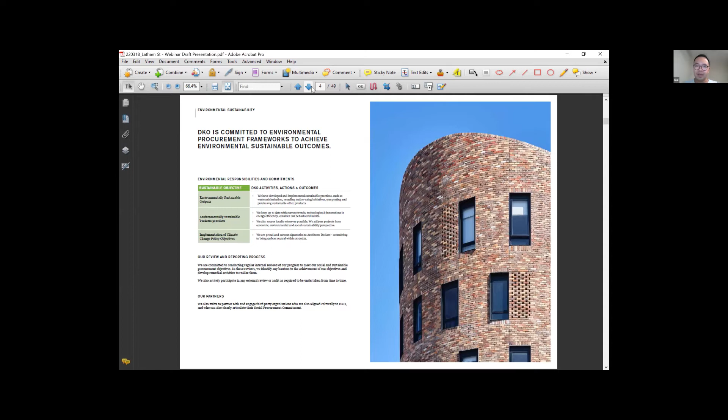We believe that green buildings are a really good idea. There's a lot of benefits, particularly if it's an asset class you're going to hold for the long term. Green buildings help with ongoing operation, maintenance, energy consumption, water consumption, waste generation, and ultimately the life cycle of materials and equipment used within the built form. I'll start by talking about 3 of the buildings we've done recently which have a sustainable slant, and then go into more detail about the Brisbane co-living opportunity.

Whenever we approach green building, we approach it from 5 key scopes: well-being, essentially being people-centric and looking at how we live our lives. Landscape and biophilic design, bringing nature back into the built environment. Energy and carbon: energy generation, electrification of buildings and the world generally. Active transport, as a way of reducing carbon emissions from cars but also promoting a healthy lifestyle. And finally, materials and waste, which go through maintenance and life cycle.

So the first building I'll share is the Arkadia building, which is in Sydney. This is a building for Defence Housing Australia, and it's a mix of affordable housing and market apartments. The building wears its green credentials on its skin, literally. All the bricks that you see on the building are 100% recycled brick.

We like to use thermal mass, particularly in a temperate climate like Sydney, where the winters aren't too cold and the summers aren't too hot, but it does get uncomfortable. Thermal mass is a really good passive way to moderate the climate within the buildings. We also make sure the buildings are orientated to maximize solar gain where appropriate, and shield the residents from undesirable solar gain, particularly from the west.

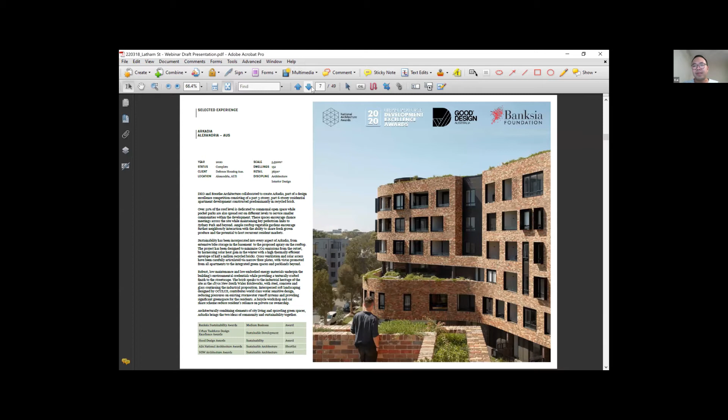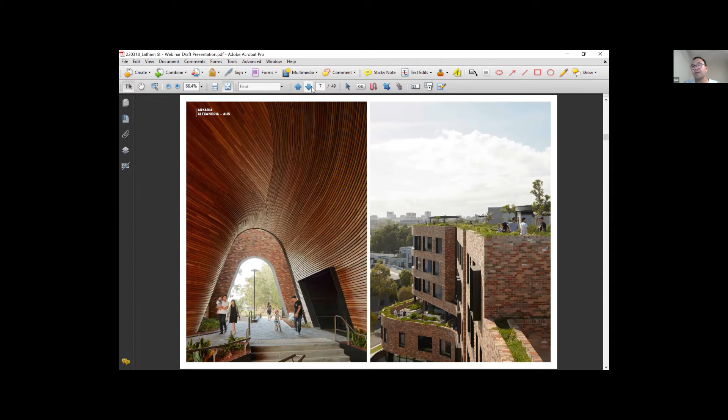The building has a series of communal spaces and gardens. About 50% of the roof is accessible to the community, because sustainability is not just about energy, materials, and built form. It is also very much about the community and social aspects of living, making sure well-being and mental health are addressed as part of design. We also design buildings with good linkages to their surroundings, so they are part of the community and neighborhood they sit within.

Various moments within the building demonstrate the linkages created, the solar protection afforded to some of the windows, and thermal breaks which help funnel air through thermal effects. A couple of slides show the recycled brick and the character it lends to the open living spaces. In Australia's generally temperate climate, outdoor living is really important, and how it connects to the indoors. And with the advent of COVID, we incorporated really good work from home spaces within the apartments, to enable residents to work, live, and recreate comfortably within the same apartment.

Next building is also in Sydney. This is Gibbons Street in Redfern. Similar climatic zones, slightly different client. This is for primarily affordable and social housing for First Nations and Aboriginal people. The building has a 7-star NATHERS rating. It's completely fossil fuel free, and it generates most of its own energy.

The materials were particularly chosen for life cycle reasons. They are hard wearing and also easy to maintain. On the left there, you could see some Aboriginal artwork, which we've commissioned a local artist to do within the building, because most of the residents in here are of Aboriginal or Torres Strait Islander descent. And then the slide on the right just demonstrates some of the mechanical systems and solar generation systems, energy generation systems we've put in place to help power the building.

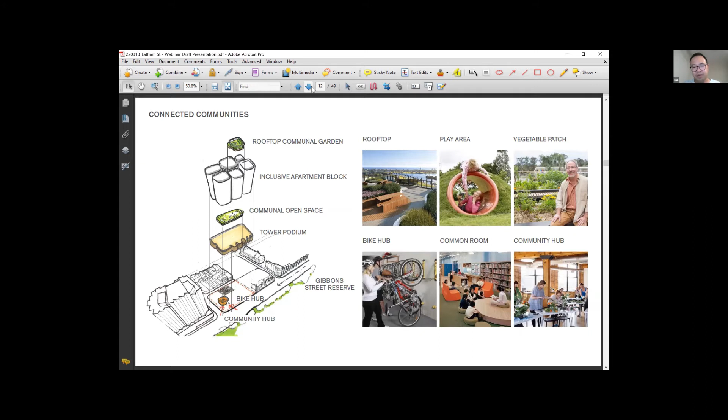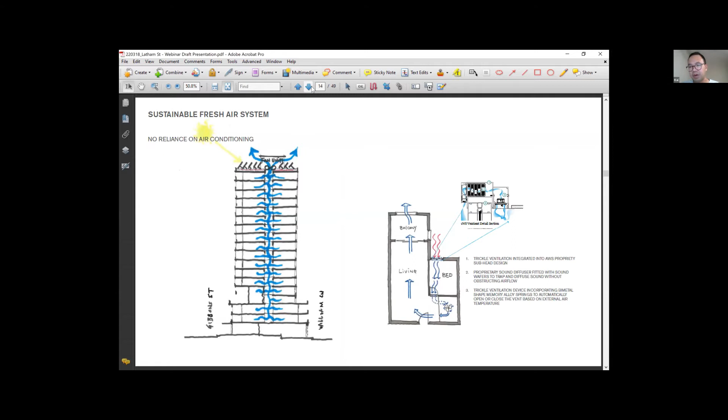A quick slide to show you a lot of the communal initiatives that we've carried through. Very similar to Arkadia, the whole communal and social aspect is really important when you're talking about sustainability. And then finally, some detail about materials. And then again, how we actually incorporate passive ventilation within the buildings through thermal chimneys, which help draw air through the buildings, so you don't need air conditioning as much as you would otherwise. There's some images in this context.

And the final project I'll briefly walk you through is Breese Street in Brunswick. This is a 7.5 NATHERS building, which is again a higher level. The built form responds to its industrial context with the sawtooth roofs, but the angle was also chosen primarily because it was the most efficient angle for photovoltaics and solar generation. So it served both an aesthetic and sustainable purpose.

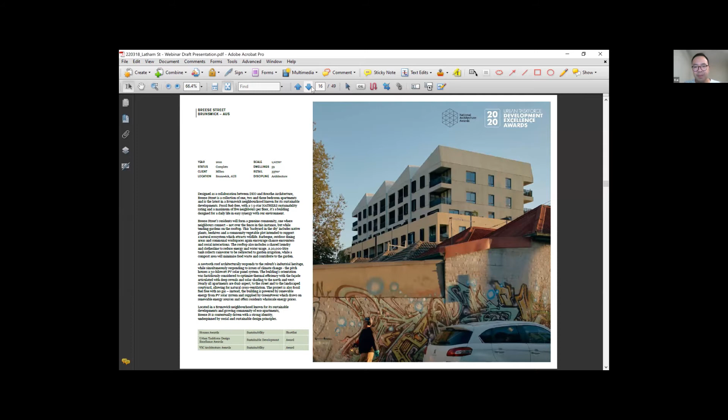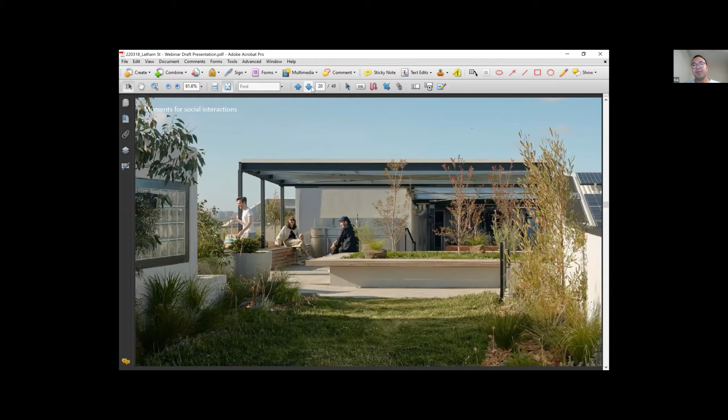The building, whilst an apartment, was designed with the concept of backyards in the sky, where most of the rooftop was again turned over for residents. You've got beekeeping, barbecue areas, laundry areas where you can hang your clothes, and that starts to generate some social cohesion within the building. Also a resident dog park, which is a favorite of the people living there. So 7.5 star NATHERS, fossil fuel free again, which means no natural gas is supplied to the building. Everything is done with electric. And also an image of the photovoltaic generation and 100% carbon neutral electric generation.

And again, all the materials chosen here are both chosen for their hard wearing nature, but also for their, I guess, natural qualities. The timber was specially chosen so that it was naturally treated. There are no chemicals that have been added that would otherwise release odor or fumes within the building. And then again, that kind of biophilic nature brings it back to its connection to nature. So I'll now talk a little bit about the Brisbane co-living opportunity.

Can I quickly just interrupt, just for our participants? You've mentioned the 7.5 star rating. Can you just put that in context? What would be average? What would be exceptional, and so on, please? Yeah, so this is an Australian rating, and I think Amir could talk to it more. Is Amir there? Yeah, I just made it back. Sure. So Rian just had a question about the NATHERS rating, which I think probably you can talk more about.

So the NATHERS rating system is a system used here in Australia to determine the thermal comfort levels within a residential dwelling. And it's a scale of 0 to 10 stars. You can think of it as 0 stars, it's the most uncomfortable dwelling. 10 stars, you essentially don't need air conditioning anymore, whether it's cooling or heating. And in terms of minimum code compliance, the average is somewhere between 5 and 5.5 stars. So to take it up to 7 or 7.5 stars, that's a significant step above minimum code requirements and minimum standards. Well said.

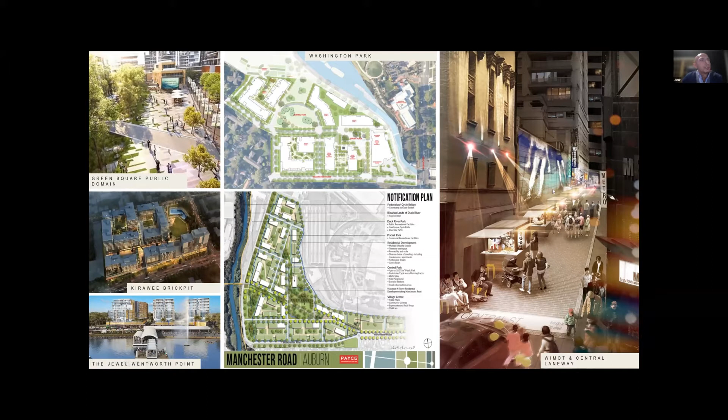And we're an employee-owned organisation. We're owned by 50 different shareholders, or what we refer to as principals, and I'm one of those, and I look after the sustainability part of the business. Now, over the last 46 years, we've been absorbing a lot of the information, with residential and accommodation precincts being at the heart of what we do, whether that's working with developers, architects, project managers, or builders. We've got a good understanding of what makes a residential building, whether it's low, medium, or high density, and what are the triggers of success that are typically required.

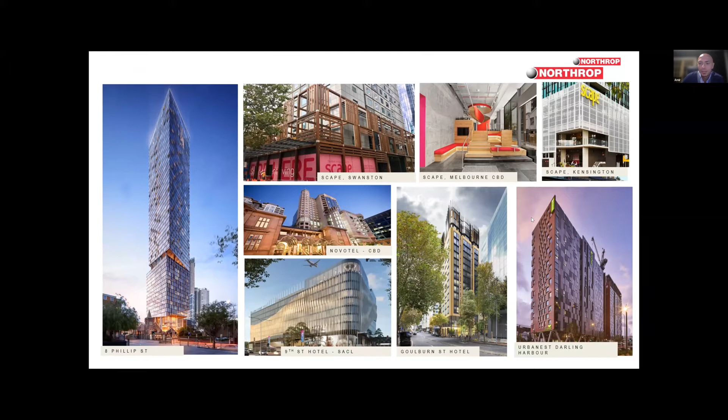And when it comes to co-living, whether it's student accommodation or shared accommodation, those triggers change slightly, but it doesn't take away from the fact that we need to make this project an absolute success, in that it needs to be talking to the financial bottom line, at the same time thinking about the occupant experience. That cannot be sacrificed, and the quality of the build, and thinking about the entirety of its lifetime should be at the absolute heart and center of what we do.

But the focus of what we're talking about today is climate change and how our activities drive climate change. We're talking about this because the building sector, when you think about operations of the buildings, procurement, construction, everything else, accounts for about 40% of the total emissions globally. So as a sector, it's quite significant. And there's a report issued earlier this week by the International Energy Agency that shows that this year, overall emissions have risen by 6%. So we're definitely trending in the wrong direction, and we've got a responsibility to do something about it.

What I'd like to do is unpack a little bit more what climate change is and the impact that we're having on the environment. So there's probably two key aspects. The first one is ecological footprint. If you're not familiar with this term, Google it. There's an eco footprint calculator that will pop up for you. You can plug in information about your standard lifestyle, and it will tell you your personal environmental impact. Fantastic toy to play around with.

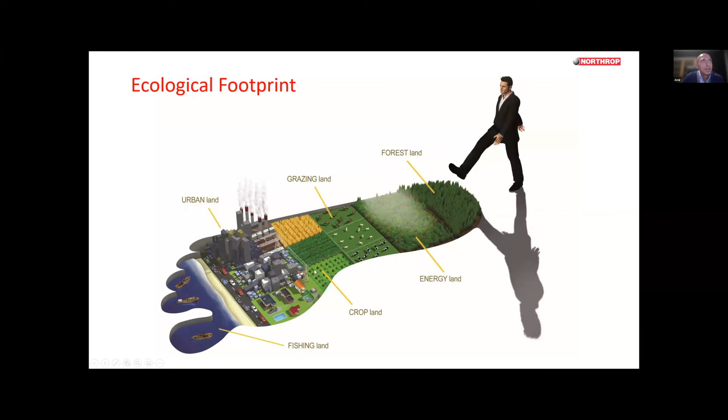What we're talking about here is if we look at all the impact we're having as human beings, whether that's forestation, energy extraction, urban agriculture, urbanization, or fisheries, and think about how much resources we are using, we come up with understanding those resources in a metric called planets. How many planets worth of resources? When this study was put together back in 2015, an average Australian lifestyle was using 3.8 Earths worth of resources. Five years later, in 2020, when this was updated, it was 4.1 Earths.

At the end of last year, I hosted a school student who wanted to do work experience, and I wanted to put up this slide to give him something to share back with the school and his family. And when I started talking, he said, no, I'm all over this. I know exactly what you're talking about. And by the way, when we've done this in the classroom, it was showing 4.7 Earths worth of resources. So we're trending in the wrong direction.

The only problem is we've only got one planet. There's no running away from it. From an equity point of view, we've only got so much to share. It's not an infinite resource, it is a finite resource, and we have to be mindful of it. So when we're thinking about setting a sustainability vision, whether for an organization, an enterprise, or a new project, there's a line in the sand that we need to draw and say we can't go below that line. And that line is usually what we call minimum standard, minimum code requirements. And that's where we're sitting with that 4.1 or 4.7 Earths.

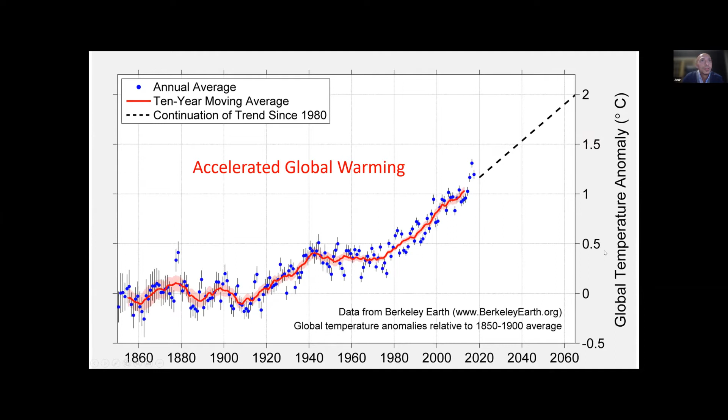Now, the second issue, which is probably a little bit more critical, is global warming and the accelerated global warming, and the fact that we're trending towards a 2-degree temperature shift. Now, the IPCC has also issued a report earlier this year that shows that we're definitely going to be hitting a 2-degree temperature shift by 2050. And with the rate that we're going, that's going to be even more accelerated, and it could be 2.5 degrees. Now, the biggest issue with that is that it starts toying around with the balance that we've got in nature.

And that particular cycle disruption, if you want to call it that, in 2019 resulted in a sea rise of 0.5 millimeters. Now, 0.5 millimeters doesn't sound like a lot, but in the grand scheme of things, we're talking about global sea rise of 0.5 millimeters. And if I continue on the topic of a disruption cycle, what that actually does is it starts charging up the climate.

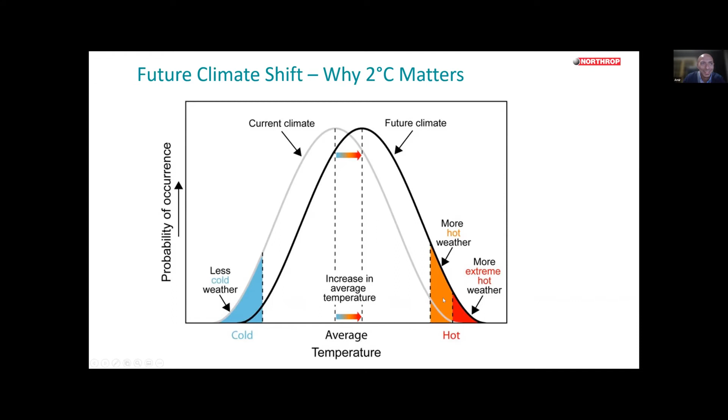Now, besides the people and the dwellings not being ready and equipped for that, think about equipment and think about all the indirect impacts and direct impacts that we start seeing from climate change. So I guess if you think about the risks, increasing temperatures, storm intensities, rainfall, etc. Excuse me. As designers, we have a very good understanding of what are the direct impacts.

If you think about your air conditioning systems, these are designed to operate at 100% at 35 degrees at factories. So we're talking about millions of units that are being shipped out of factories to operate at a maximum of 35 degrees. Anything beyond that, it would operate for 2 or 3 days, then it would fail. Now, you start thinking about 15 days worth of 45, 46 degrees, you need to start thinking about the damage that starts causing. That's besides the astronomical rises that we're starting to see in energy costs, the damages, flooding, failures, etc.

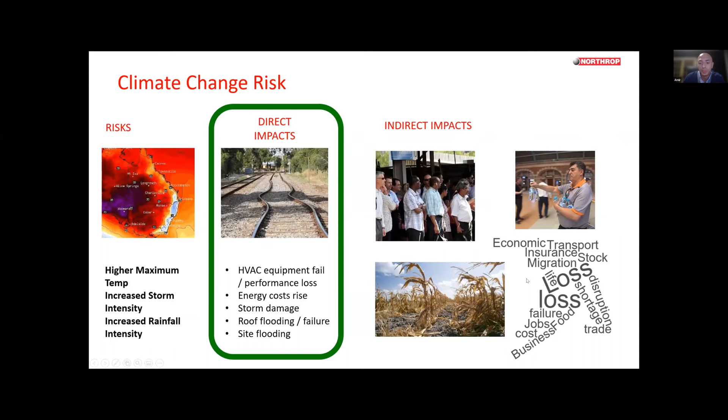And then all we're left with is loss. Loss of life, loss of business, economic loss, disruptions, trade. And again, we've got the ability to future-proof our assets today if we start designing for climate resilience for, I guess, the entirety of the lifetime of a building.

Now, I guess it sounds a little bit doom and gloom. That's not the intention. I guess I'm just raising awareness more than anything else. But the key thing to be thinking about is climate resilience actually creates a lot of value. So what I've been talking about in terms of designing for climate change, that's more on the adaptation side of things.

So think about what are the risks that the assets might be subject to, and think about how to mitigate those risks. But what about mitigation of climate change altogether, not just the risks? What about, again, contributing to reducing the impact that we're having on climate change and contributing to restoring the climate?

Now we're talking about a median price of about $700,000. So we're talking about some significant premiums that are being attracted here. And the other key thing to point out is that there's research that shows that there's a $2 billion untapped market of young individuals, young couples and young families who are looking to buy into sustainable living.

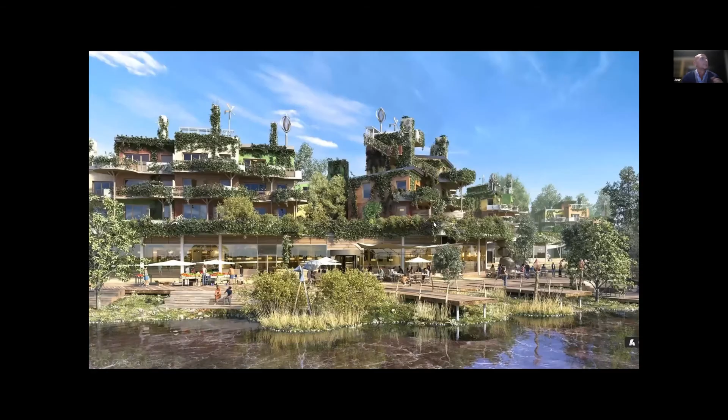The example that we're looking at on the screen there, for those who may not have seen this before, is Les Villages Nature Paris.

And if anyone speaks French on the call, I'm sorry if I butchered that.

But this is an ecotourism destination that has 900 holiday homes, and it attracts about 900,000 people annually. You can see a lot of fantastic key features there in terms of enhanced ecological, external and internal ecological value. You can see on-site renewable energy generation that's above and beyond just solar.

But probably one of the key things that I quite like about this one is an open-air swimming lagoon that's heated up to 30 degrees using geothermal heat pumps, which is essentially running loops to the ground and to the core, utilizing the fact that we've got constant temperatures below the Earth's surface throughout summer and winter, and just extracting heat from that and using it to heat up that lagoon.

This project has been delivered in partnership between Euro Disney and Groupe Pierre Vacances Center Parcs. So it's a fantastic development that shows how you can enhance the quality of a destination, and then the revenues just start flowing through. Another example is what I refer to as the big project.

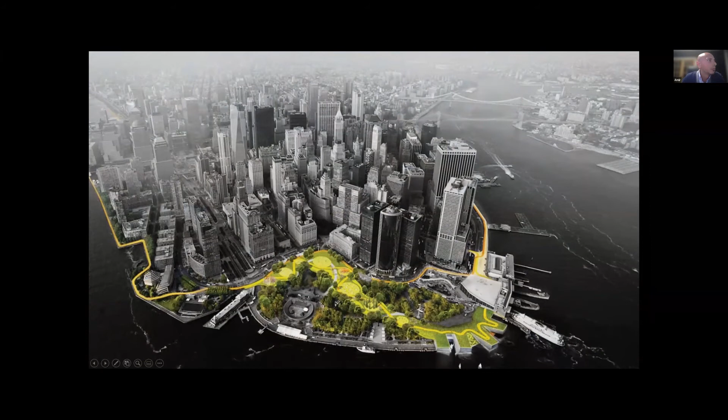This is a $335 million commission that's been happening over the last 4 years. This is Lower Manhattan, if you couldn't pick it out. And this was a commission that was put in place after the last set of damages that were experienced by Hurricane Sandy. And basically what we're looking at here is a storm surge protection barrier that's being instigated to protect the cityscape by implementing all those natural bioswales, parks and the like.

And what you can clearly see here is that it's not just about protecting the assets, but what's happening in the process is that there's a lot of space activation and pulling communities back into the cities. And one of the clear things that we've all been seeing as an effect of COVID is that all our CBDs have turned into ghost towns, and all different governments and councils and local property councils are thinking about different metrics of how they can pull people back into the CBD. And this is one of the clearest ways of how this could work: space activation, building communities, and creating a space where you can live, play, and work.

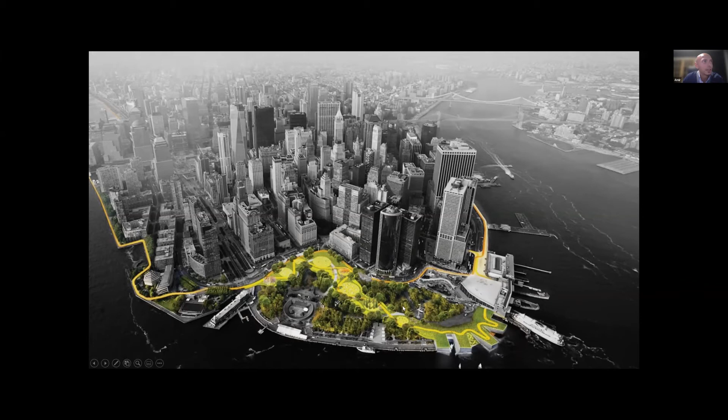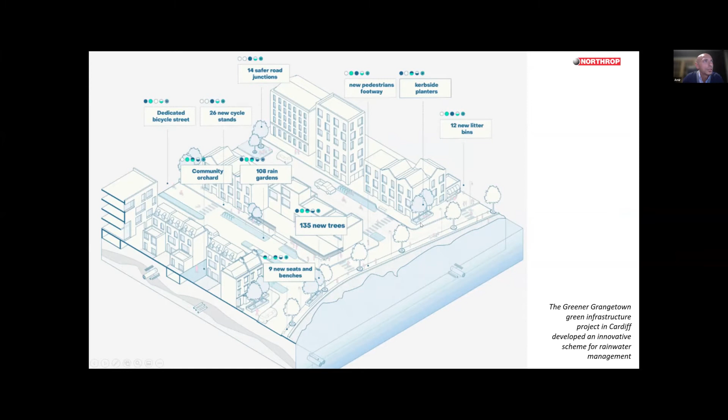Another one is the Greener Grangetown project in Cardiff. This happened at the same time a refurbishment or urban activation project was being undertaken for the new high-speed rail link project. And this particular one is quite interesting because they set up a stormwater treatment system under the entire precinct, and what they've done in the process is developed an innovative scheme for rainwater management.

And what they've done is created this whole concept of live streets by, again, looking at a lot of rain gardens and bioswales by way of treating stormwater, and looked at planting different species and trees in particular. And that has been a very clear way that not only ticks the boxes from a sustainability point of view, but when you think about lifting the value of the asset, absolutely ticks the mark.

There's a research paper that I saw about 4 years ago that showed every tree that's being planted outside a low density home enhances the value of that dwelling by anywhere between $5,000 to $15,000, which is quite significant. It's nothing to ignore. So, when you're looking at your next project or investing in a project, and the first thing someone's talking about is we need to get rid of those trees. Well, not really. Maybe we need to talk about how do you either build around it or relocate it. But there's a direct link in terms of lifting the value of the asset there.

Amir, can I just ask you a question? You're mentioning adding $15,000 in value and so on. So from a valuation perspective, how difficult is it, or what's the best approach to determine that value or that value add?

Look, I guess it comes down to the sector. Back to the rating tools that I was talking about. One of the key things that we started seeing here is that having a building that targets one of those rating tools, that is the easiest way to demonstrate value. I guess the commercial sector is probably a little bit ahead compared to the residential sector, but you'd experience this anywhere in the world, actually, with any building sector.

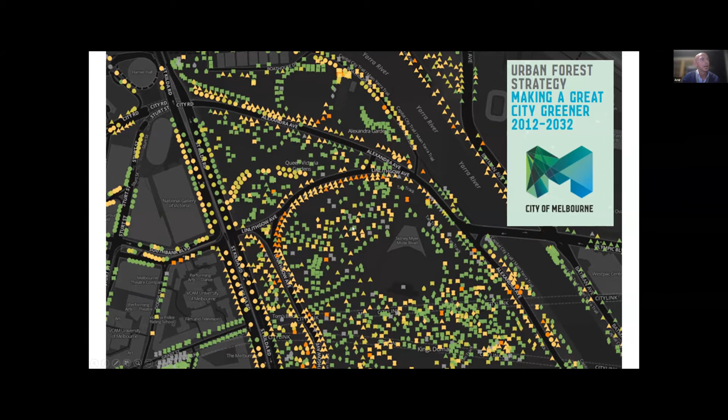Blue grids is having a lot of the waters and the creeks run through and one connected big stormwater system. And the green grids is looking at vegetation and how you can actually enhance that. Again, urban heat island mitigation, as well as lifting up the asset value and place activation throughout the cities.

Timber is obviously a massive one around the world. It's been gaining a lot of momentum over the last 10 years. And CLT timber, structural timber and construction is now becoming more and more of a norm. We're now starting to see projects that are challenging height limits and a lot of the perceptions that are out there. We're seeing buildings that are 20 plus stories.

And in terms of a footprint, we're working on a building at the moment that's got a floor plate of 2,400 square meters. Apologies, don't know what that is in feet, but someone can do the conversion for me. But there are no more restrictions around fire resistance, scalability of timber.

Timber is a fantastic carbon sink if it's sourced from what we call FSC certified or Forest Stewardship certified timber, that means it's coming from either a recyclable source, or it's coming from plantation sources that have been running sustainable plantation schemes, which means every piece of timber that's being used is being replanted again, and over the lifetime of a building, it's a renewable source of materials from a circular economy point of view. That's besides the fact that it's just a carbon sink.

It just sits there. Timber buildings, compared to steel buildings, steel uses about 5 times as much embodied energy and carbon in the procurement and the construction process. And concrete buildings, they use about 24 times as much. So it only makes sense for us to be using timber.

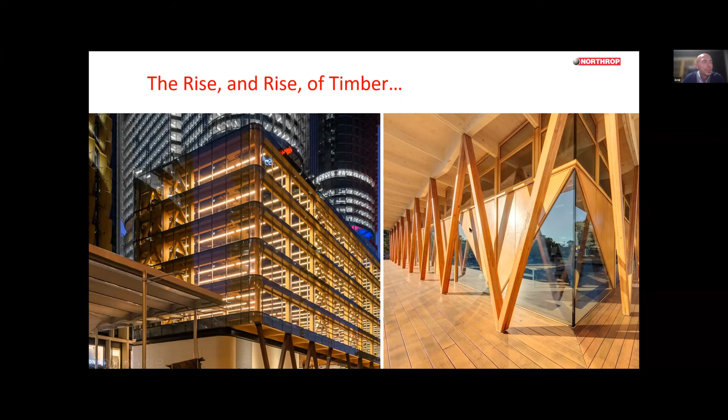Besides the embodied carbon in the construction, it's a fantastic wellness and biophilia initiative. As human beings, we're wired for our brains to be connected to nature. Hence, when you're working behind a screen and you want to de-stress, you want to be looking outside a window and have a visual disconnection from this artificial environment that you're glued to for 8 to 9 hours. You want to be looking at skies, greens, water features and the like.

And bringing timber inside spaces that we occupy is a fantastic way of doing that. Besides all, I guess, the benefits from a hypoallergenic point of view, in that it's the least amount of toxins that you can be putting into a space with the right treatments and the like.

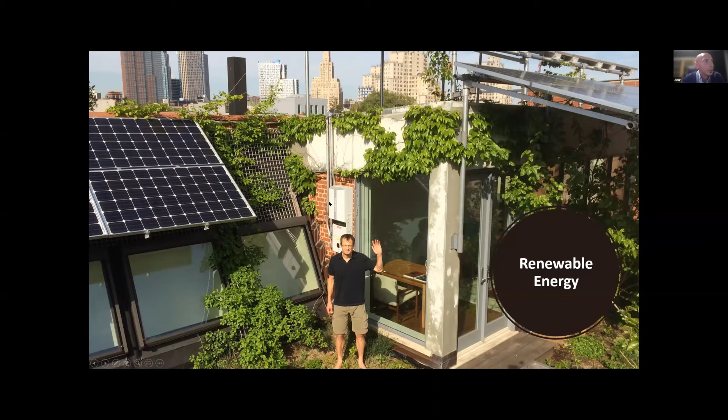Another fantastic one is renewable energy and energy sharing. We're starting to see the rise of blockchain, which is the ability for individual owners and occupants of residential dwellings to have their own micro renewable energy plant on their own roofs and harness all this power, put it into the battery, and be connected to the wider community, in that if they realize that they've harnessed so much energy and they don't have a use for it that particular day, they can actually sell it to the adjacent neighbor and get paid for it by way of an incentive.

And when you start implementing systems like that, the first thing you're thinking is, yes, please give me more solar and give me the biggest battery that you've got. So these are the small change of mindsets that we can be looking at from an investment point of view to unlock all those different options.

Last slide that I'm going to leave you with is that we're talking about a lot of ambitions. The world is racing to a 2030 and a 2050 net zero target in order for us to be able to mitigate the risk of this 2 or 2.5 degree temperature shift. That doesn't mean that we have to go 150% effort today.

I guess what we're promoting and advocating for is today is the day that you stop and think, what can I do to create a plan to hit a target in 2030 or beyond? And what are the step changes that we can start taking today? We don't have to do it all today. You can start taking small steps, baby steps towards reaching that target, and that will still be commendable, and that will still address a lot of your investors' needs and a lot of the demand of the market that is out there.

Thank you. Sorry once again about the disruption, but I might hand back over to Guy to continue with his fantastic presentation and perhaps take us through the Brisbane project that we've been involved with recently. All right, thanks, Amir. Great presentation as always. Let me just continue on from where I left off.

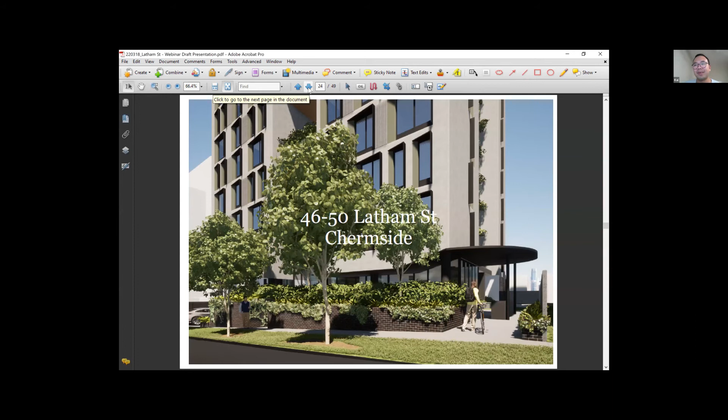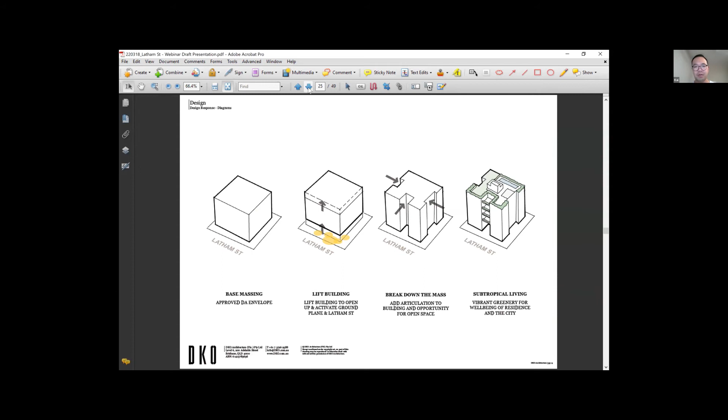So the Brisbane co-living project. So look, it really worked well with Amir setting up the presentation before, because a lot of the things that he touched on, the broader picture stuff, really gives the context where we are starting to carry some of these ideas into the building we're doing. So just looking at the building, it actually starts out with an existing approved envelope. And in order to convert this into a co-living building, one of the first moves we did was lift the building off the ground plane.

A co-living building houses quite a lot of residents, and a big part of the sustainability when you talk about co-living is the communal aspect of it. How do you create a community of people within that, and then the benefits that come through that? So making sure that the ground plane was a great place to be, that there was a part where the public and private could meet.

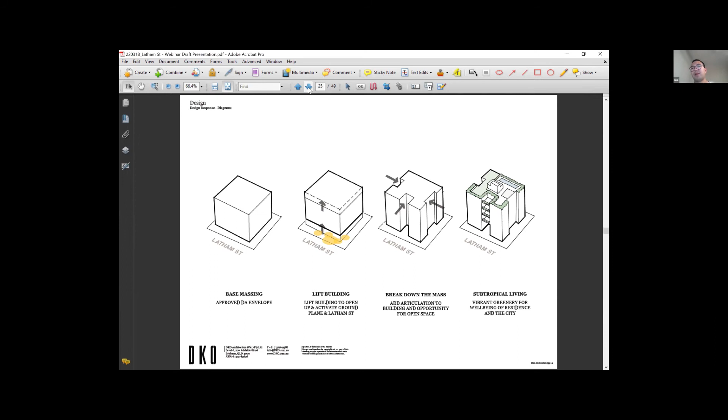And the next thing we did was cut deep slots within the building. A lot of it's to do with bringing natural light deeper into the building core, making sure that there was natural ventilation, and making sure there was good cross flow through the building. And then finally, because we are in Brisbane, a subtropical climate where you spend a lot of your time outdoors, making sure that there was a lot of greenery in the building, bringing in those biophilic elements that Amir mentioned just now, and making sure that the building was green both from a planting and landscaping point of view, but also from a sustainable point of view.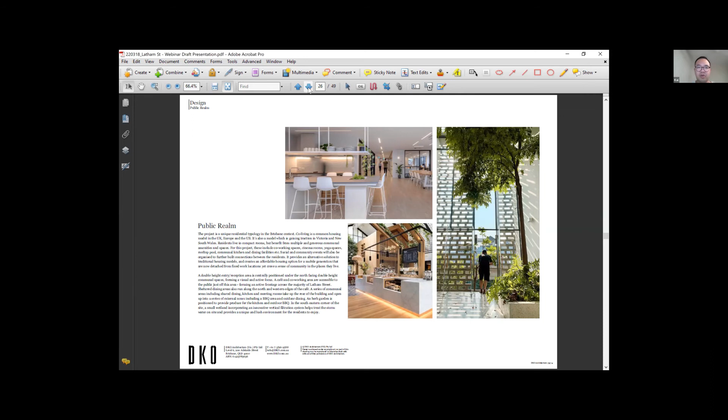The public realm was something we worked quite hard on, as we mentioned. So we're looking to put in a lot of great communal features in here. There's going to be a large co-working area linked to a cafe. The cafe is going to be open to the public, and that will create a really buzzy hub at the entry. Further back, we've got social spaces like communal kitchens, communal dining spaces, and outdoor rooms where the residents could cook together, clean together, enjoy a meal together, and then generally enjoy the outdoor spaces within the property.

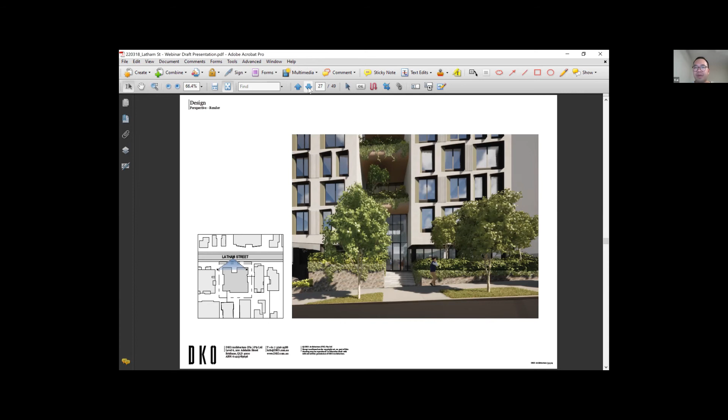The building takes a lot of its cues from the history of the site. One of the ways that we like to work is to look at the context of the building.

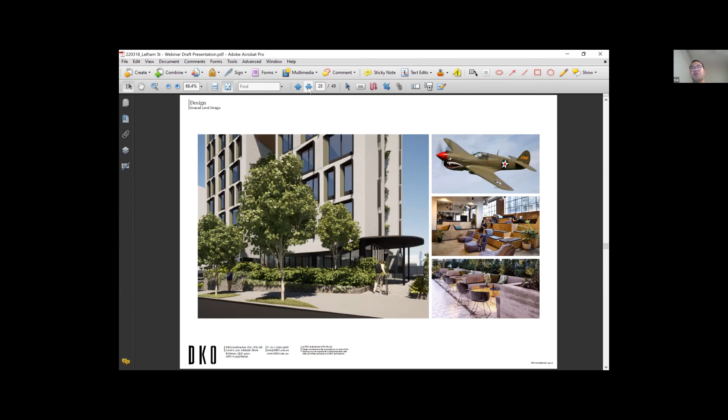Chermside used to be home of one of the Australian Air Force bases, and some of the colorations and the forms that we use actually draw on the Kittyhawk flag, which is quite an iconic plane used during that period.

Up through the tower, we are looking at a lot of communal spaces. You've got little discrete communal spaces on each floor, but on every second floor, you have a double height outdoor area, or what we call an outdoor loggia. This is protected on all sides except for one, where you look to the north towards the views, and then obviously generous landscaping around seating areas.

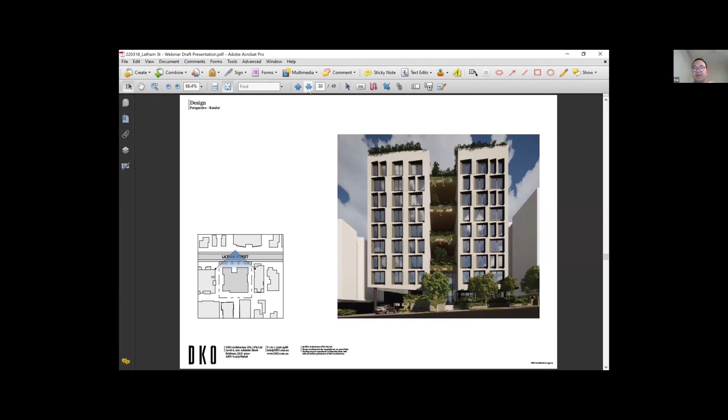One of the key things that we always look at when we are designing in Brisbane is what the local council requirements are. From a sustainability point of view, council goes by a code which is called Buildings That Breathe. There are 8 elements within the code. And for all the projects that we do, we really look at how we can address each of these elements to help both from a development application point of view and to be successful with council, but also to incorporate the sustainable elements that should be done within built form anyway.

So orienting yourself is the first element. By this we mean that we have designed the rooms so that they are orientated to take advantage of the northern elevation and eastern elevation, protecting the rooms from the western elevation, and also minimizing the ones that are facing true south because they get the least amount of sunlight, and also making sure that views and opportunities are captured.

Occupy outdoor spaces is especially important in a climate such as ours. The subtropical climate means that a lot of people spend a lot of time outdoors. And when you're in a co-living building, what we try and design for is outdoor spaces where people can be joined as a community or communally. So rooftop spaces are important, as well as the double height sky decks that I've mentioned before.

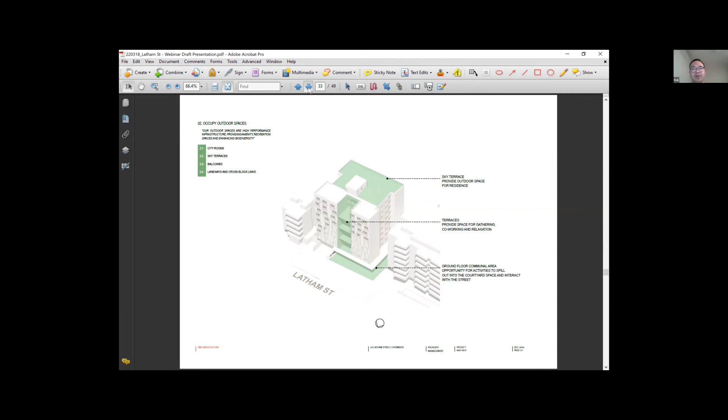Natural daylighting is important from an energy reduction point of view, making sure that the windows are appropriately designed so that they let in the right amount of light and the right kind of light, but also making sure there are awnings and sun hoods to the windows so that they also block out lighting that is not necessarily wanted. For example, the harsh western sunlight in afternoons, which makes rooms pretty hot in most instances.

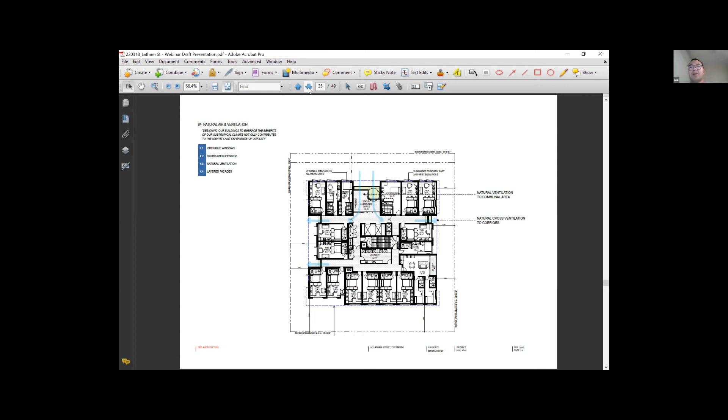Shade and protection I've mentioned. Good orientation is really the first principle of good design, and then where we need to, we add further protection to those openings. And then finally, living greenery, and I'll talk to this a bit more in the last slides at the back, where we go more into the landscaping. But needless to say, Brisbane is an environment where landscaping grows really well. There's a beautiful lushness to everything planted here, and that's what we want to take advantage of.

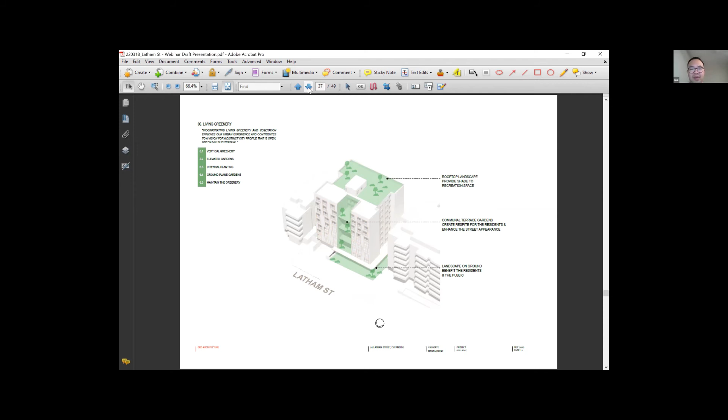And identity matters, which touches on choices of material, longevity, and maintenance, making sure that the life cycle is considered, especially because this is an asset that you will hold on to for quite a long time. And finally, reducing energy and waste, which is really about opportunities for generating electricity on site, capturing rainwater and reusing that on site, and also reducing waste through good waste management systems with the residents.

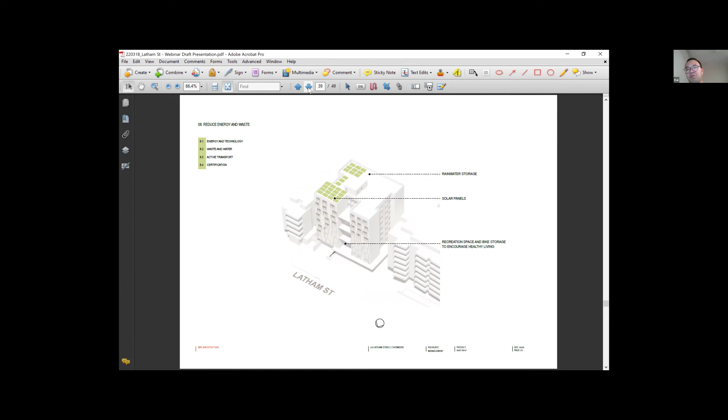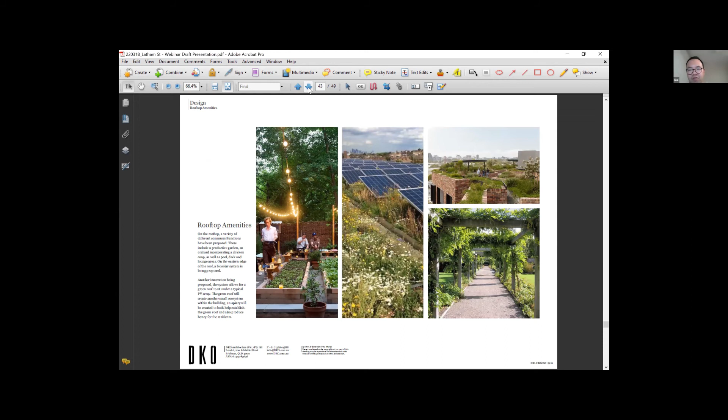I won't go through the floor plans because I think we're running out of time, but we'll quickly touch on the roof. So the roof terrace is really meant to be this lush playground for the residents. And then with the landscape elements, we're looking at integrating water sensitive urban design, a wide range of amenities, layering of the greenery, and then creating engaging spaces.

And then these boil down to 5 sustainable design principles in landscape, which is minimizing impervious surfaces so rainwater can be captured, providing different microclimatic conditions, a pool in the sun so it's nice and warm when you're swimming, but also shaded spaces so you can go outside and read a book away from the sun. Water sensitive urban design and how we treat and store water.

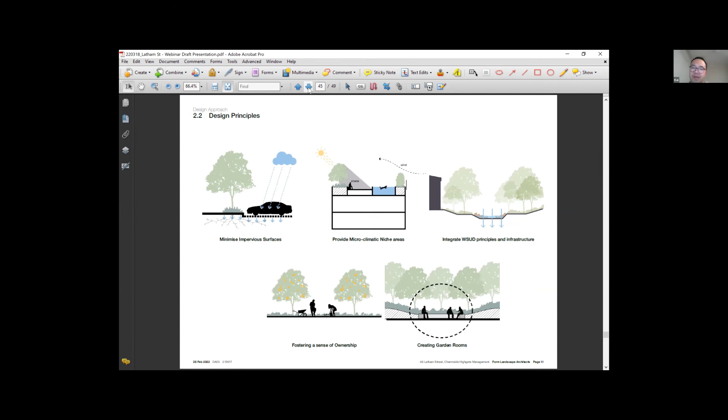A sense of ownership is created when we start to provide productive gardens, apiaries, chicken coops, and the like for the residents, and they can start to take a bit of ownership. And then finally, creating garden rooms so you can enjoy the great outdoors.

One of the more creative things we're doing here is what we're calling a bio-solar facility, which is basically creating a solar array to generate renewable energy, but also creating microenvironments underneath that to cultivate flora and fauna on the rooftop of the building. And that's kind of a snapshot of how the roof looks at this moment. On the right is the biosolar array.

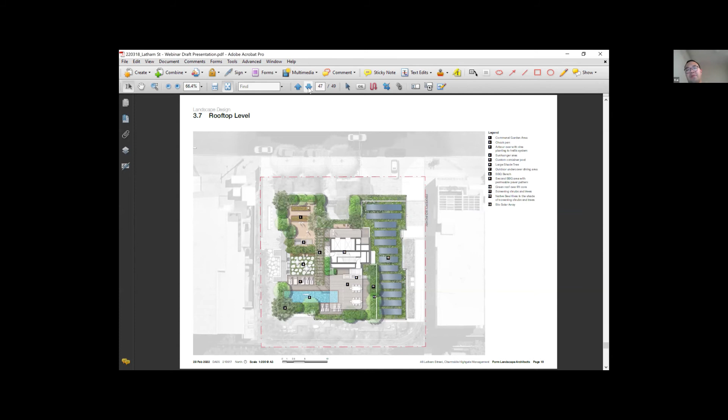You can see that the rest of the roof is highly programmed. You've got productive gardens to the top left. You've got barbecue areas linked to that. You've then got a quiet zone for yoga and so forth in the middle. And then finally the pool zone with lush landscaping all around to provide natural shading and so forth.

And then just finally touching on the irrigation strategy. Rainwater is really important to be captured and stored well, particularly given the weather events that Brisbane's been encountering recently, making sure that we're capturing as much of the water as we can. Some of the water needs to be filtered, and to do that, we've created a little mini wetlands with a biofilter and creek through the site, and that also becomes a great amenity for the residents.

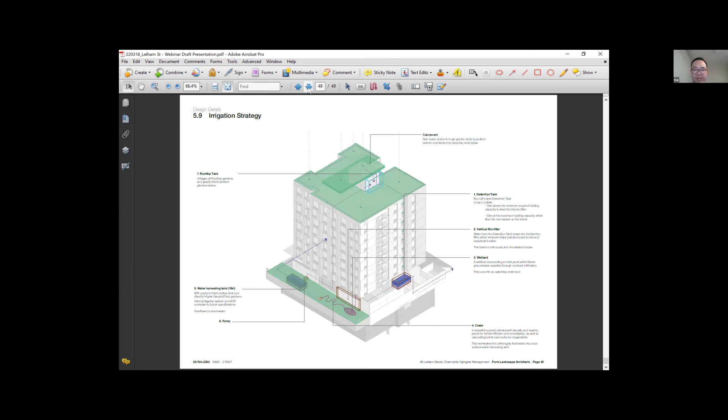The water is then harvested and reused throughout the building, so there's quite a nice water cycle storage through there as well. And I might end it there.

Back to you, David. Thanks, Kai. Fantastic presentation as well. I'll just try and share my screen and I'll get back to where we were. Okay, thanks to both Amir and Kai. Had to swap the order of presentations a little bit there.

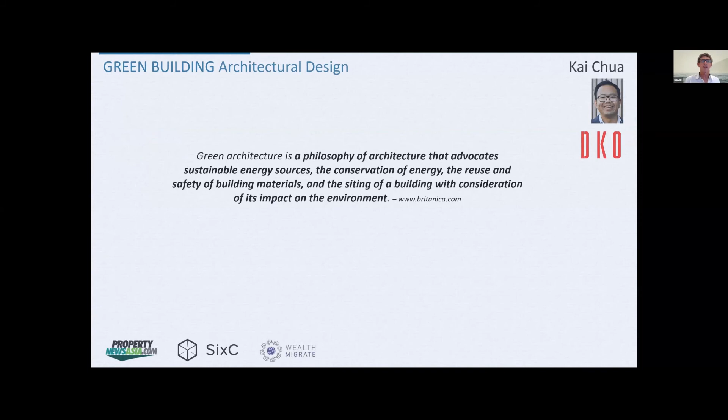I'll go through fairly quickly what I've got to get through because I realise we're running out of time. I'm going to talk about co-living, and then in particular the Brisbane co-living building, but from a developer owner-operator's perspective, rather than just from a design perspective.

So humans have caused a lot of degradation and stress on the planet. It's up to us to mitigate further damage. As Amir has shown, the real estate sector is one of the biggest contributors to climate change, accounting for some 25 to 30% of the overall. However, there are innovative alternatives out there, and one of these alternatives is co-living. The co-living sector has a big potential to contribute positively to the real estate industry as an environmentally and socially sustainable housing model.

The purpose-built co-living sector's positive contributions to reduce impact on climate change. As Amir and Kai have shown, we can achieve sustainability through leading-edge design that reduces the cost to heat and cool a building, and also mitigates the heat island effect. Then the reduction in operational expenditure through reduced power usage, which is really a focus on life cycle costing across a building's operation and development, instead of just focusing on its capital expenditure cost up front.

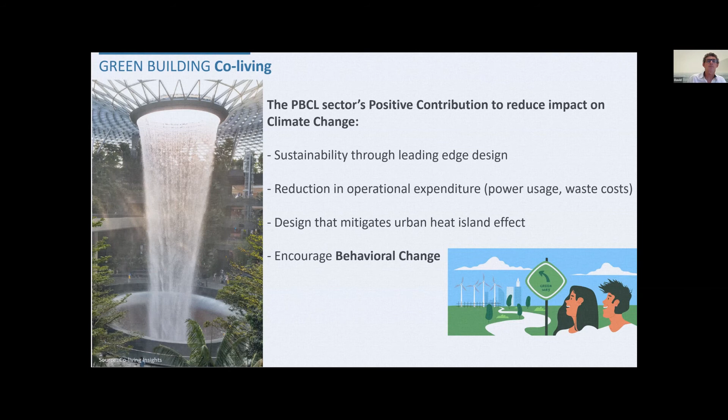Also, one of the things that co-living operators can help with is that we can actually encourage behavioural change by helping inform, encourage and influence our guests. So on that note, shared living can have a catalysing effect on pro-environmental practices. Co-living operators have the ability to influence the behaviour of their guests to create communities that inspire climate action and awareness. In doing so, this can lay the foundations for a pro-environmental culture.

Simple examples include putting a timer on showers, monitoring power usage, but monitoring it so that our tenants have that information at their fingertips, so that they can actually understand what their usage is, but going further than that and creating fun and rewarding incentives for tenants to actually watch it, look at it, and reduce their power and water consumption. We can also encourage modal shift to public and active transport options.

For our co-living development in Brisbane, we have been able to leverage off Brisbane City Council's green building incentive policy, as well as optimising life cycle costings for the building through reduced energy and water consumption, as well as the savings that are becoming available through green-focused financiers.

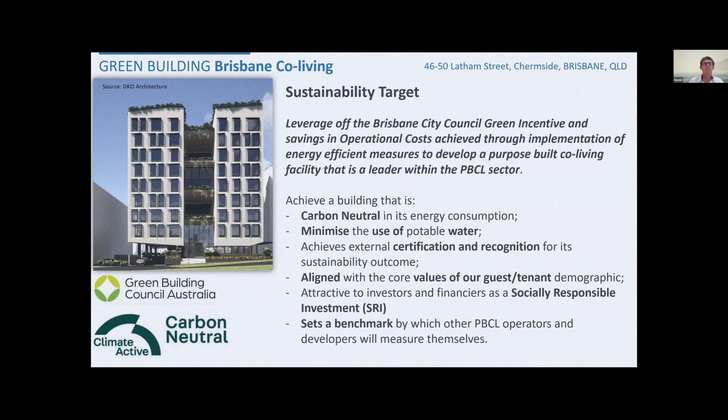The sustainability initiatives: these include the elimination of fossil fuels on site, solar cells and solar batteries to run as much of the power as possible, extensive plantings on ground level, including biosolar, which Kai has shown you images of, to mitigate the urban heat island effect, LED lighting and motion sensors, appliances within 1 star of best available, energy shutdown switches on all units and rooms, share cars to be electric and recharged by solar, share bikes and electric bikes, and those electric bikes to be recharged by solar. Efficient air conditioning.

We're looking to currently use geothermal, which utilises loops down into the ground to help heat and cool. We're also using efficient hot water through electric heat pumps, biofiltration of water, which Kai talked about, rainwater collection and reuse, implementation of waste recycling and minimisation, and also then implementation of guest tenant incentive programs.

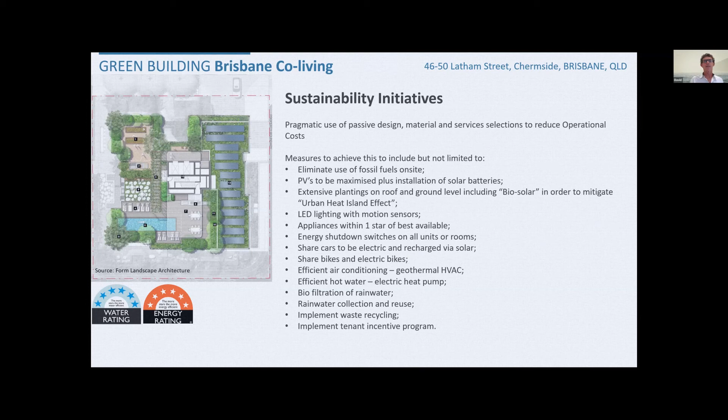So we've engaged Northrop Consulting through Amir and his team, who are working extensively on the project, and have basically modelled the design where we're at. And so the measurable forecast sustainable outcomes: we have an improved energy consumption whereby, as opposed to a normal building, it's reduced by 40% with that design. When you then add in purchase of renewable electricity for what is remaining, we are able to get to a carbon neutral outcome for the building.

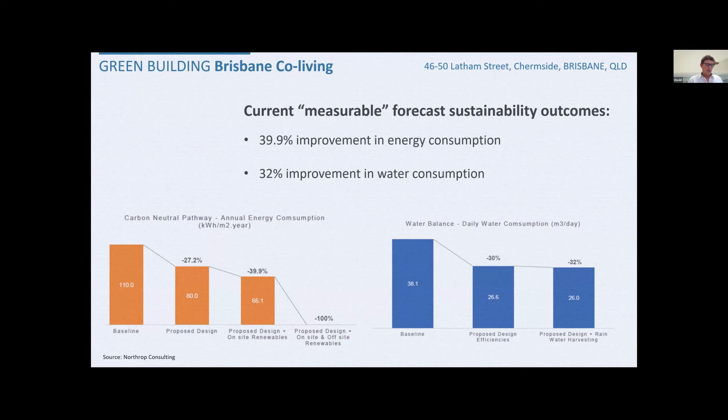Similarly, with water balancing, just through the design measures that we're implementing, we're able to reduce the consumption of potable water by 32%. For this to be successful, the operator needs to be fully aligned. The operator is the developer, and so 6C is the joint developer and operator for the Brisbane co-living. 6C is currently moving towards carbon neutral certification at an organisational level, which will add to 6C's current commitment on environmental, social and governance fundamentals.

Our focus is to create buildings and communities within those buildings that have an aligned value of reducing mankind's impacts on the environment. 6C recognises we are in a position to help drive required changes within the way we live, so as to help achieve a better future for everyone on this planet and for the generations to come. So that concludes our presentation for today. I will now hand back to Rian.

David, thank you. Kay, Amir, thank you very much. David, I must congratulate the team. If I look at the panelists we had 2 weeks ago and the quality of the panelists today, it gives a lot of comfort that there's a top quality consulting team and professional team involved with 6C and also in terms of Brisbane co-living. Can I just ask, David, you've mentioned that 6C is a, yes.

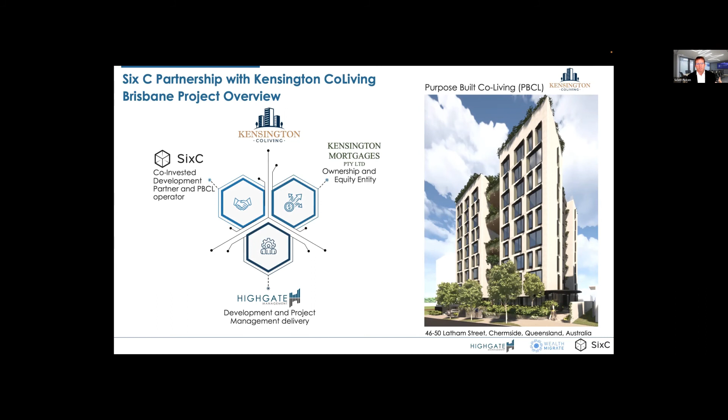And just by the way, I want to echo what Rian just said. I thought the panelists were amazing with your information. I love this saying by Richard Branson, that doing good is good for business. And what I just heard was, by investing in green and sustainable, you're really going to achieve great results not only for the planet, but financial results as well. I think what David and others have mentioned is there's actually an opportunity. It's all good and well to learn about green energy and sustainable investing, but one can actually do it.

And what 6C is doing is they're putting together a portfolio of 6 different co-living buildings, around 5 in Sydney and 1 in Brisbane. And what we're talking about today is this one in Brisbane that investors can literally participate in.

Now, I've got a number of slides here and I'm not going to bore you because of time, because we've done a webinar and we've actually got a webinar in 2 weeks' time around the Australian economy, how resilient the Australian economy is, how well it's done during COVID. We're also going to talk about the property market in Brisbane in general and how strong that market has been and why co-living is really good within that market. And then equally is the conversation around the Olympics and the impact that the Olympics is going to have.

In summary, when one looks at it, Brisbane is the top market in Australia right now. Affordability is a key issue. First-time home buyers are reducing because of the affordability issue. Interest rates are rising and driving rentals. Densification is a major trend. The bottom 25% is the most stable part of the market. And there's an increase in rentals as borders open. And all of this speaks to everything we've just discussed around the sustainability.

So by getting both the investment right and the sustainability, then if you didn't watch last week's webinar, I would highly recommend it on why invest in co-living, the space of co-living, what is happening with regards to the returns and the advantage of those returns, and then finally, the future growth potential.